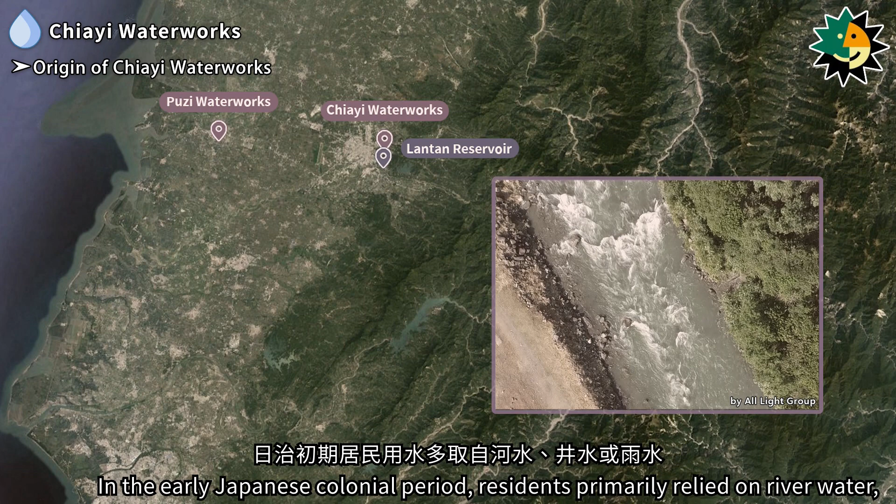In the early Japanese colonial period, residents primarily relied on river water, well water, or rainwater for daily use. These sources were often filtered through sedimentation or with the use of alum, then simply boiled before drinking. However, contamination of water sources and improper disposal of household wastewater led to significant public health issues, including the spread of epidemics.

To resolve the water supply issues, the Japanese government implemented the Chiayi City Improvement Plan, which involved the construction of the Chiayi Waterworks. This project included establishing a water intake point to channel raw water to the headwater point in the eastern suburbs of Chiayi City. After undergoing sedimentation, the water was filtered slowly and then delivered to the city by natural gravity for residents to use. Chiayi Waterworks began construction in 1911 and was completed in 1914.

A weir and the Juchi water intake point were established on the Niuchou River at Zhangshuping village, 4.5 li east of Chiayi town. Later, as industrial development led to increased water demand, an expansion project was launched in 1931. This project added water intake points at Fanlu and Choku to supplement the Juchi water intake point, adjusting according to seasonal needs.

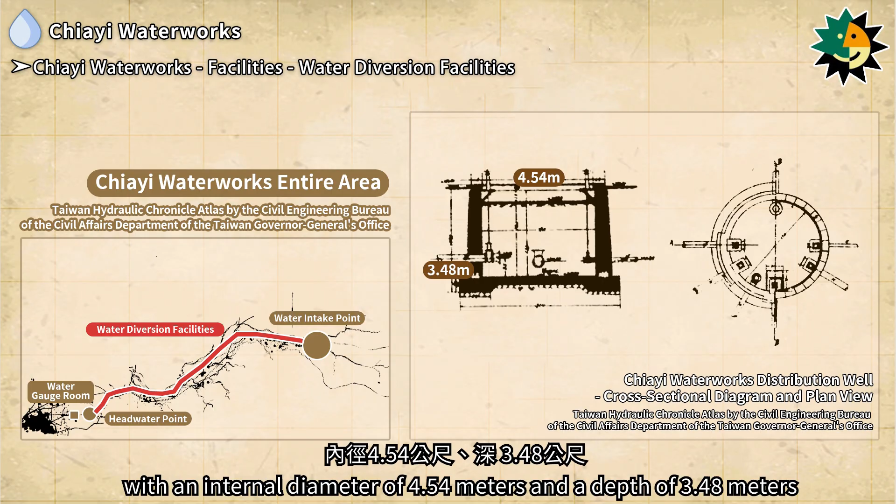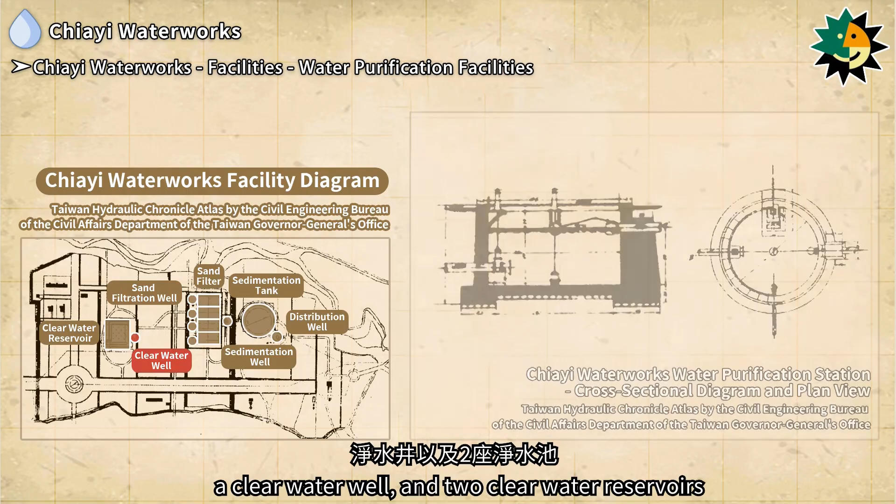The water intake facilities of the Chiayi Waterworks include a weir, a desilting well, and a water intake well, all constructed from reinforced concrete. The water diversion facilities include 2 12-inch iron pipes and a reinforced concrete distribution well with an internal diameter of 4.54 meters and a depth of 3.48 meters. The water purification facilities include a sedimentation tank, a sedimentation well, sand filters, sand filtration wells, a clear water well, and 2 clear water reservoirs.

The water gauge room, originally part of the Chiayi Waterworks project and now known as the water meter room, serves to measure and regulate the water supply, providing essential domestic and industrial water for the Chiayi area. It is responsible for recording the daily water flow of the waterworks before distributing it through the city's water supply network. The water gauge room is a reinforced concrete structure covering an area of 29 square meters.

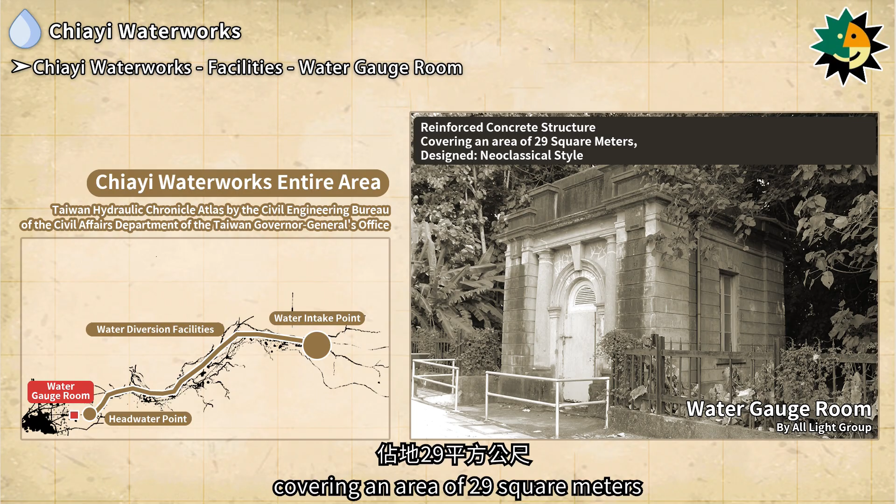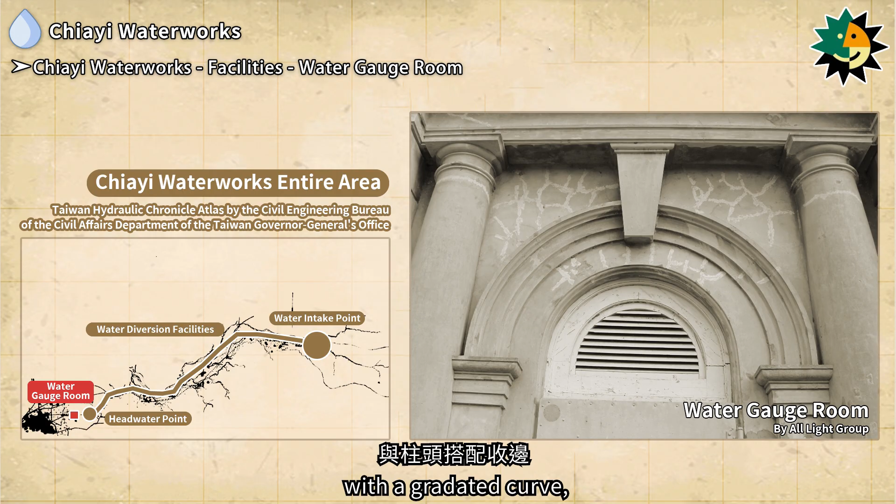Architecturally, it is designed in a neoclassical style, with the exterior divided into 3 sections: the base, the wall body, and the gable. The structure features robust columns paired with a simplified gable design. The front facade has 4 protruding columns, and above the main entrance is an arch with a gradated curve, complemented by a Romanesque arch and keystone motif at the entrance.

The water distribution of the city street starts from the clear water reservoir, passes through the water gauge room, and then is sent to the city streets via 14-inch iron pipes. The diameter of the pipes gradually reduces to 12 inches, 8 inches, and 6 inches, providing water for both residential use and fire hydrants in the city.

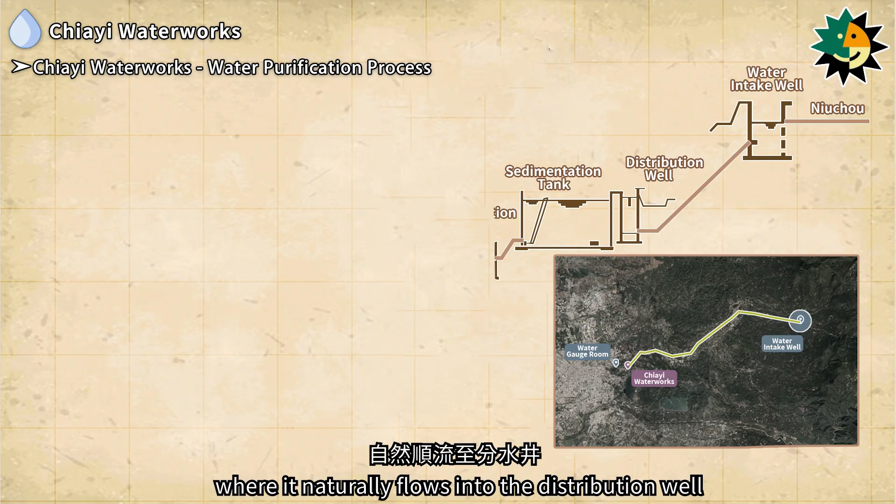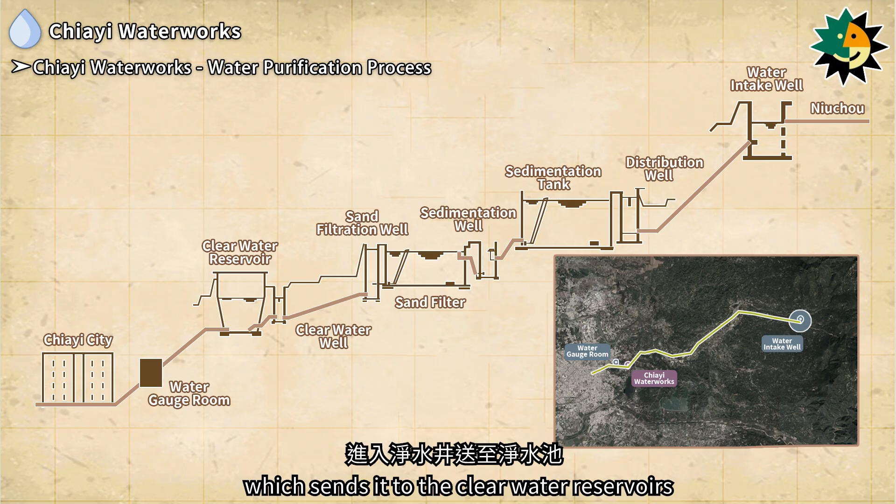The water purification process of the Chiayi Waterworks involves diverting water from the Niuchou River into the water intake well, where it naturally flows into the distribution well. The water then passes through the sedimentation tank, sedimentation well, sand filter, and sand filtration wells, before entering the clear water well, which sends it to the clear water reservoirs. After passing through the water gauge room, the water is distributed to Chiayi City via pipelines.

Due to Chiayi City's topography, with higher elevations in the east and lower in the west, the entire water supply process, from raw water intake to city distribution, relies solely on gravity, eliminating the need for pumps.

Although the scale of the Chiayi Waterworks has changed significantly compared to the Japanese colonial period, most of the facilities within the headwater point area have been preserved. These cultural assets were officially designated as Chiayi City Historic Buildings in 2015 and have been preserved to this day. The Chiayi Waterworks has been out of operation for many years and is no longer in use, but it is now open for public visits year-round.

Puzi Town was the location of the Dongshi District Office during the Japanese colonial period. Drinking water was mainly sourced from wells, resulting in poor sanitary conditions. In 1901, a large-scale plague outbreak occurred and wasn't eradicated until 1918.

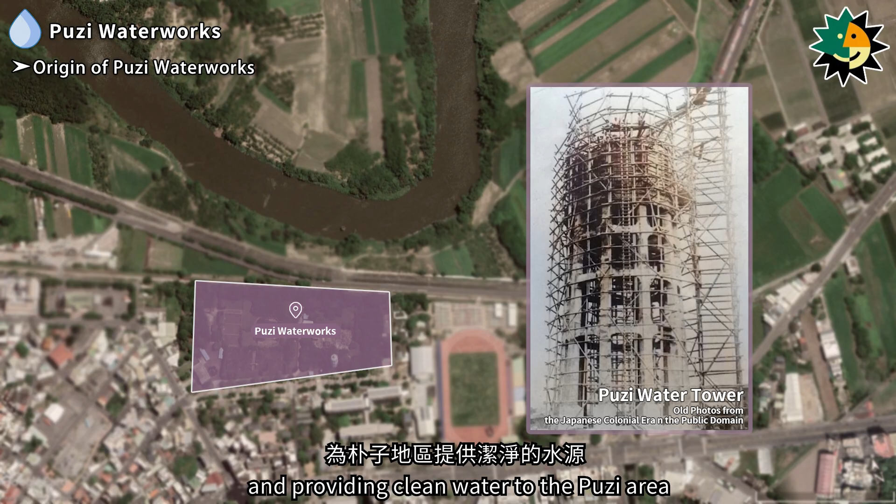To improve the town's sanitary environment, construction of the Puzi Waterworks began in 1933 and was inaugurated in 1936, improving drinking water hygiene and providing clean water to the Puzi area. The water source was drawn from the Puzi River to supply residents with water for daily use.

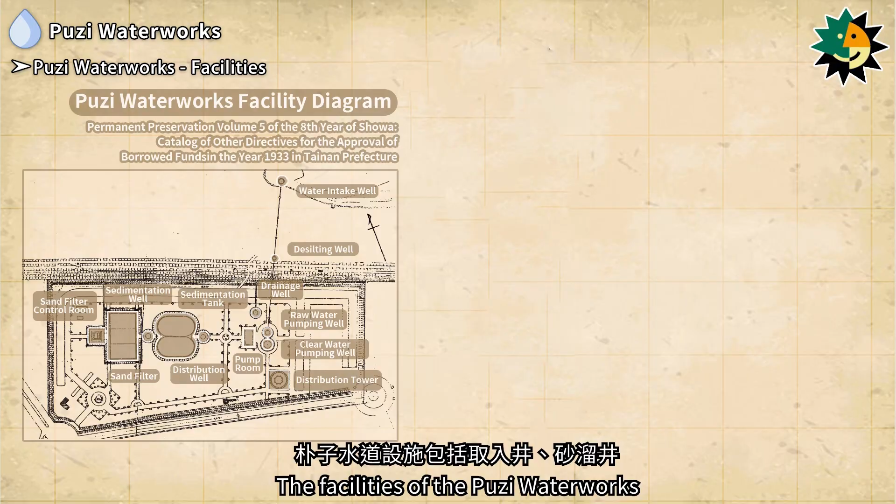Later, due to sediment accumulation and water pollution, wells were drilled to extract groundwater. In 1974, the Puzi Water Purification Station came under the management of the Puzi Operations Station of the 5th branch of Taiwan Water Corporation. Groundwater extraction was stopped in 1998, and the water purification station was converted into a water storage and pumping station.

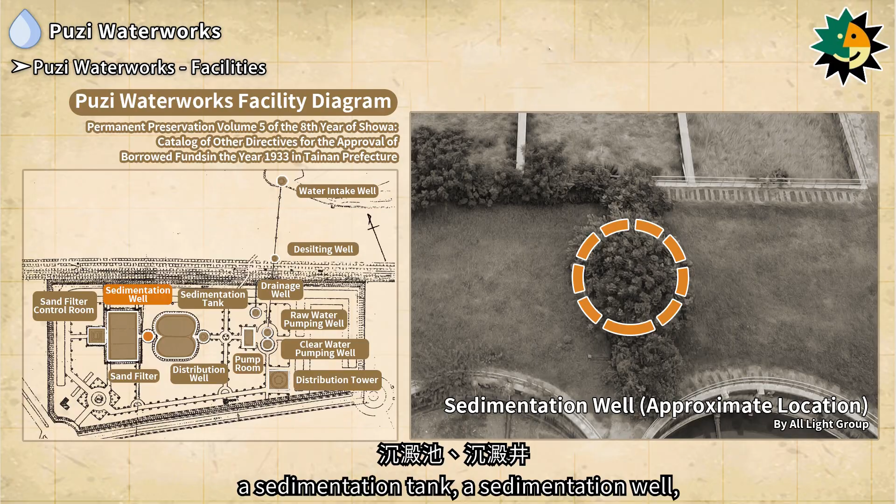The facilities of the Puzi Waterworks include a water intake well, a desilting well, a raw water pumping well, a pump room, a distribution well, a sedimentation tank, a sedimentation well, sand filter, a sand filter control room, a drainage well, a clear water pumping well, and a distribution tower.

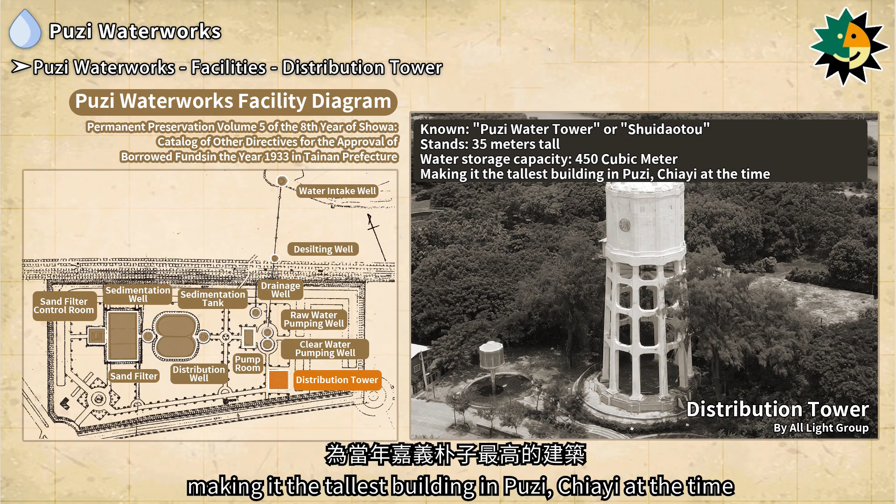The Puzi Waterworks Distribution Tower, also known as the Puzi Water Tower or Shuidaotou, stands 35 meters tall with a water storage capacity of 450 cubic meters, making it the tallest building in Puzi, Chiayi at the time.

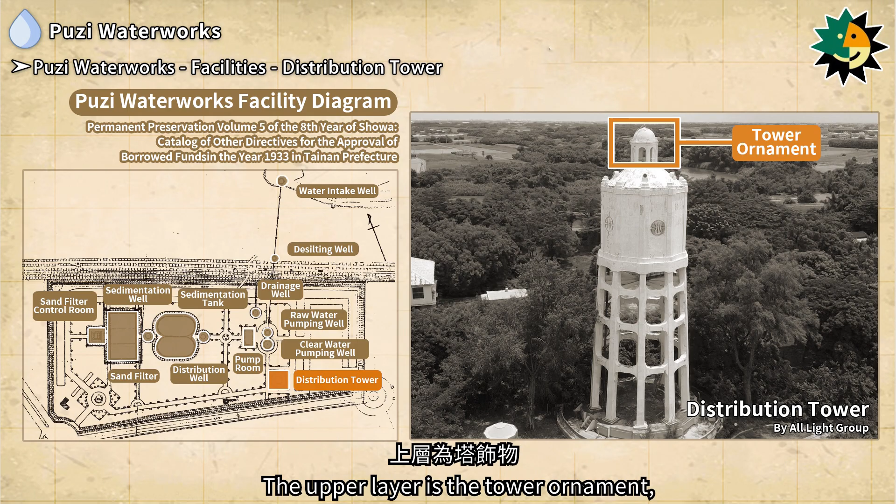The tower features a European architectural style and is divided into 3 sections from top to bottom. The upper layer is the tower ornament, the middle layer is the water tower body, and the lower layer is the tower frame. The tower ornament is a bell-shaped, 6-sided round dome pavilion.

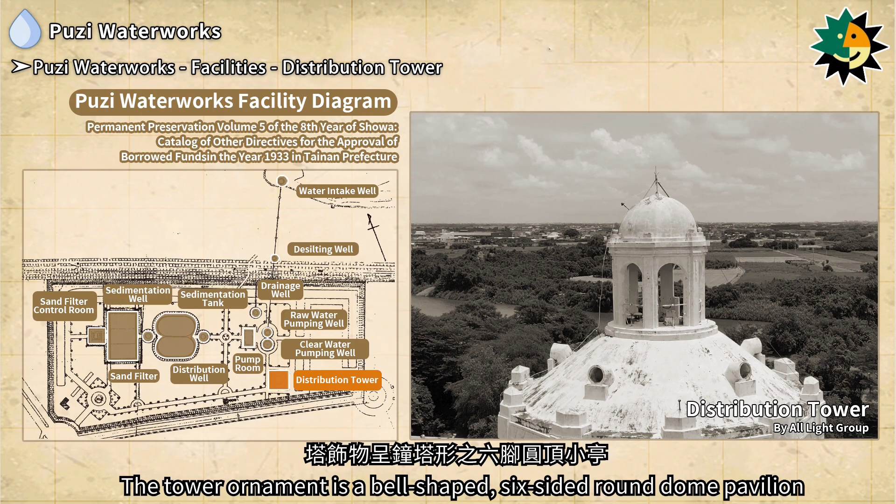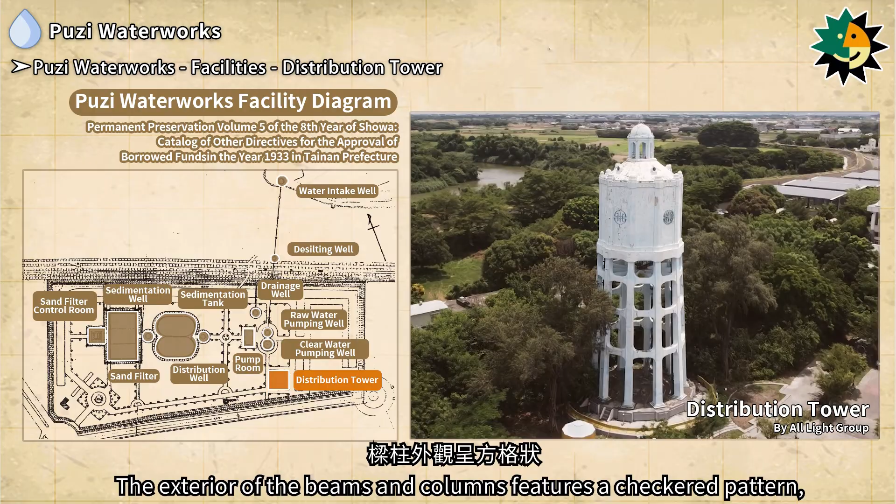The water tower body is circular, and the lower layer of the tower consists of 4 ring beams supported by 10 columns. The second ring beam is reinforced with a radial grid of columns for additional support. The exterior of the beams and columns features a checkered pattern, creating a highly aesthetic design. This structure is one of the most important landmarks in Puzi, Chiayi.

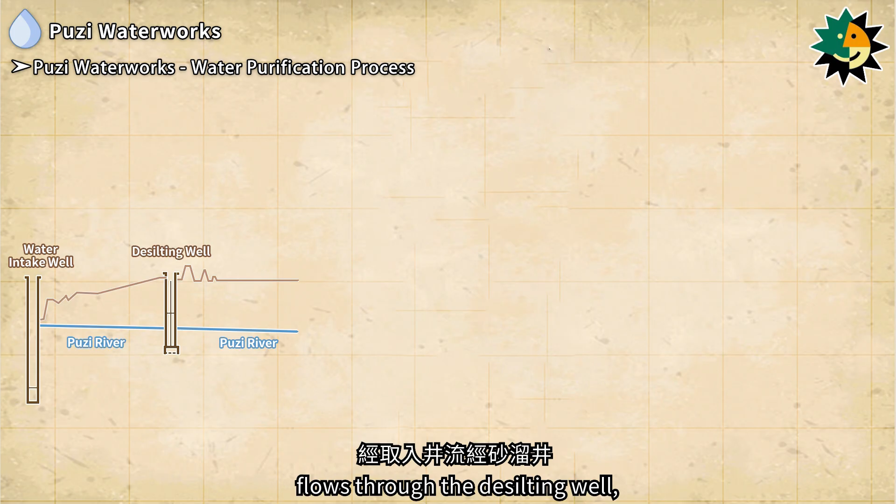The water purification process of the Puzi Waterworks begins by extracting raw water from the Puzi River. The water first passes through the water intake well, flows through the desilting well, and is then sent to the raw water pumping well. After being pressurized in the pump room, the water enters the distribution well and then flows into the sedimentation tank for settling.

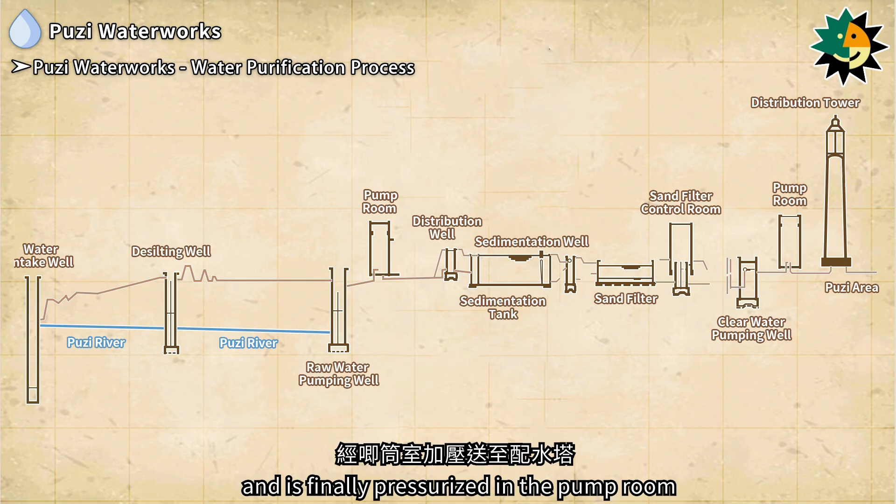The upper layer of water is directed from the sedimentation well to the sand filters, where it is filtered and purified. The water then passes through the sand filter control room, is sent to the clear water pumping well, and is finally pressurized in the pump room before being delivered to the distribution tower for supply to the Puzi area.

The Puzi Waterworks was an important public health and epidemic prevention system for the residents of Puzi Town during the Japanese colonial period. Today, it still retains a complete system from that era, including water intake, sedimentation, filtration, pressurization, and distribution. It holds significant educational value in water resource management. In 2006, it was registered as a historical building, and in 2014, it was designated as a county-level historic monument.

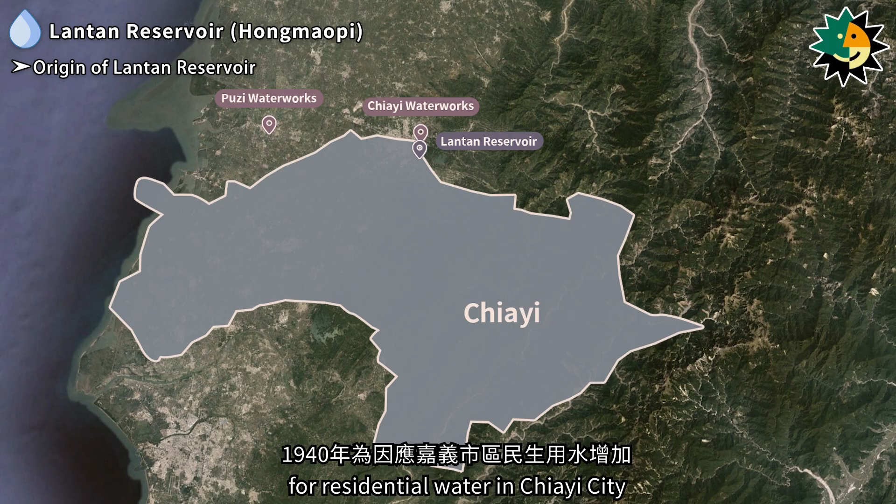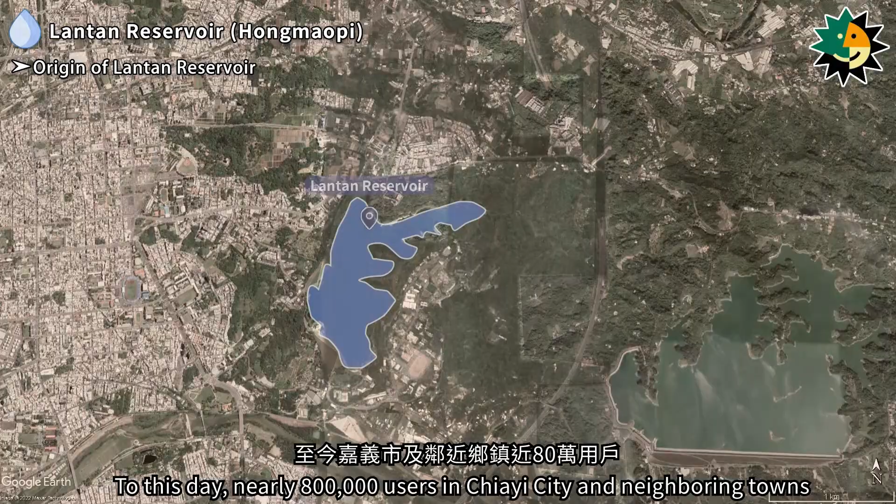In 1940, to address the increasing demand for residential water in Chiayi City and the significant industrial water needs of the Chiayi Chemical Workshop, civil engineer Yamane Chojiro planned and designed the construction of the Lantan Reservoir. Construction began in March 1942, and the reservoir was inaugurated in March 1944. To this day, nearly 800,000 users in Chiayi City and neighboring towns continue to rely on the water resources provided by the Lantan Reservoir.

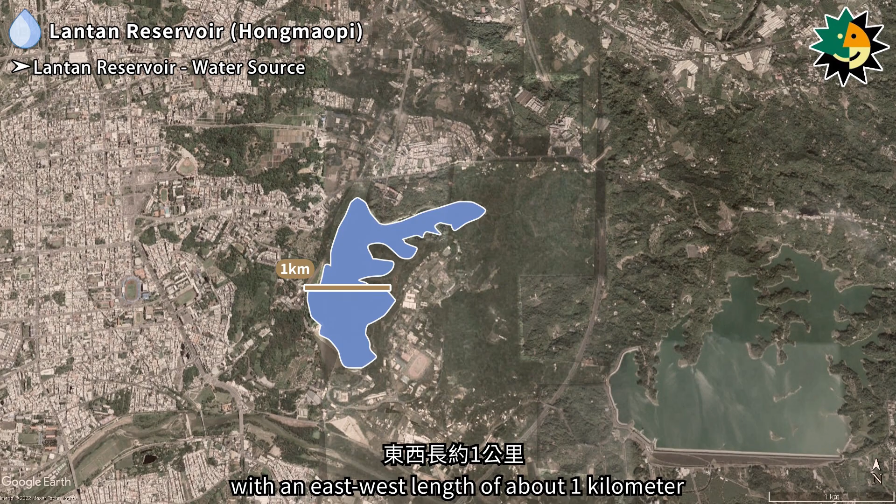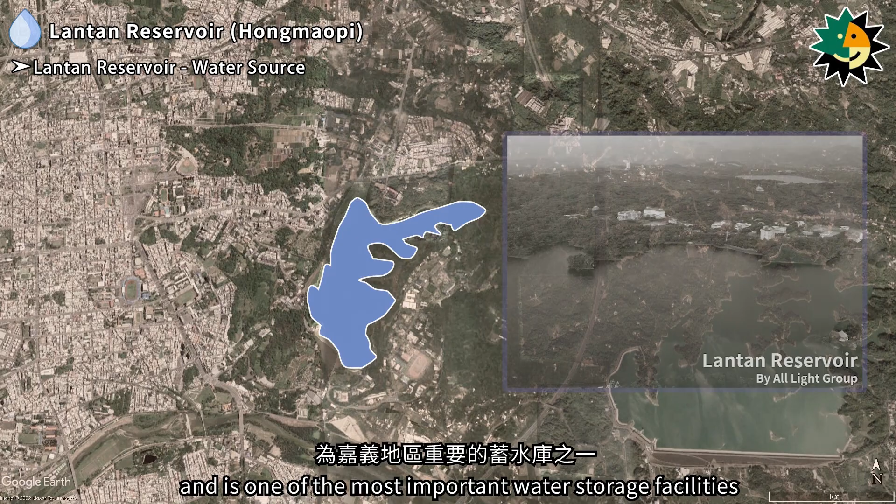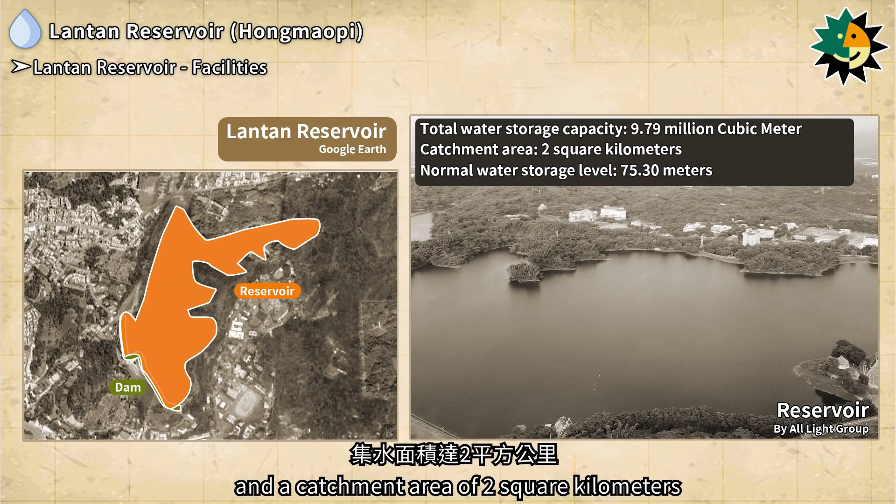The reservoir has a total water storage capacity of 9.79 million cubic meters and a catchment area of 2 square kilometers. The normal water storage level is 75.30 meters. The dam is a rolled-fill earth dam with a concrete core wall, with a crest elevation of 77.30 meters and a total length of 546 meters.

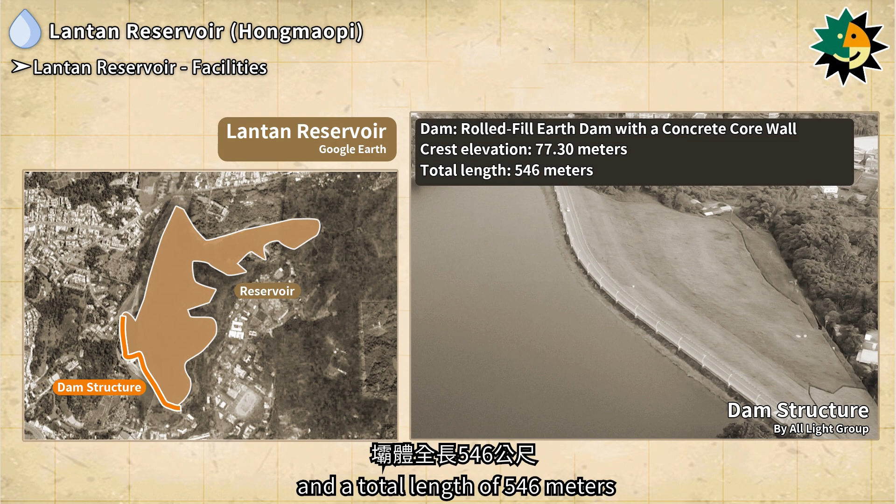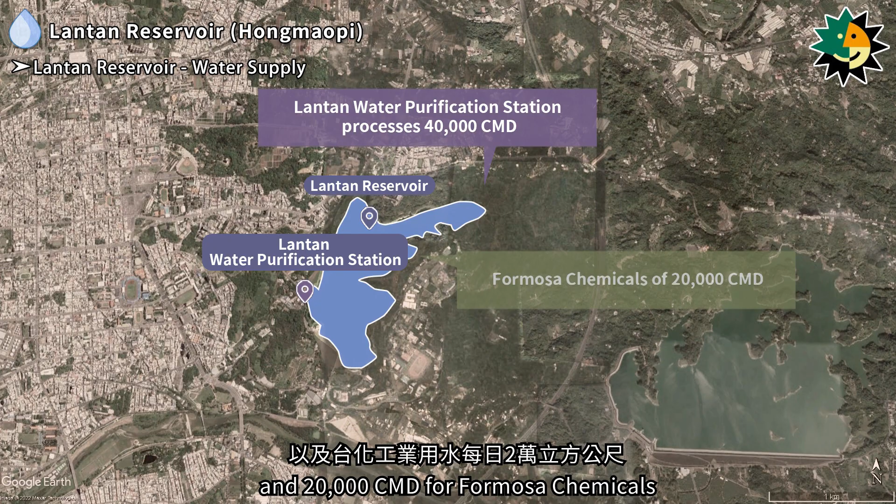The Lantan Reservoir primarily supplies 40,000 cubic meters per day to the Lantan Water Purification Station and 20,000 cubic meters per day for Formosa Chemicals and Fiber Corporation's industrial use. As the population in the Chiayi area rapidly increased, a project to raise the height of the Lantan Reservoir was initiated in 1971. The height increase was completed in July 1972, bringing the reservoir's effective storage capacity to 9.35 million cubic meters. This was also the first time in Taiwan that the height of an earth-fill dam reservoir was raised.

In the early Japanese colonial period, the growth of industry and population in the Chiayi area led to a significant increase in water demand. At that time, most water sources, such as river water and well water, were not properly treated, resulting in many public health issues and the spread of epidemics. To improve water quality, a new headwater point was developed.

The main water supply systems built during the Japanese colonial period utilized the natural terrain and nearby water sources, distributing water to residential areas through gravity. The construction of the Chiayi Waterworks, Puzi Waterworks, and Lantan Reservoir had a profound impact on the development of the Chiayi area. Many of these facilities have been preserved for over a century and are now historical buildings open to visitors.

In the next episode, we will continue with an introduction to the public water supply developments in Chiayi during the Republic of China era. Stay tuned!